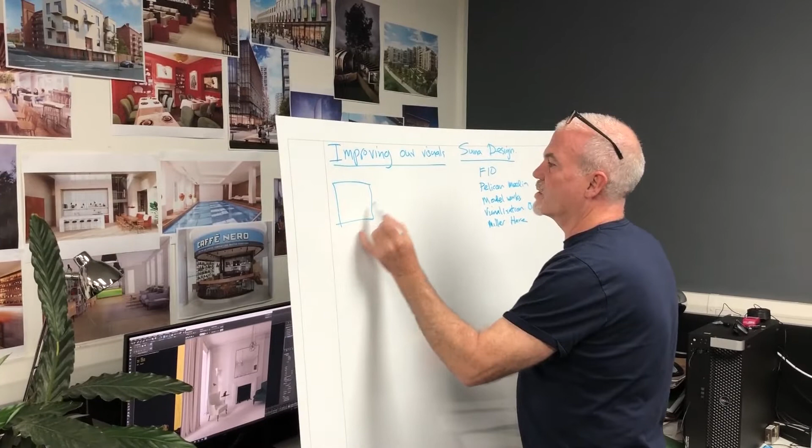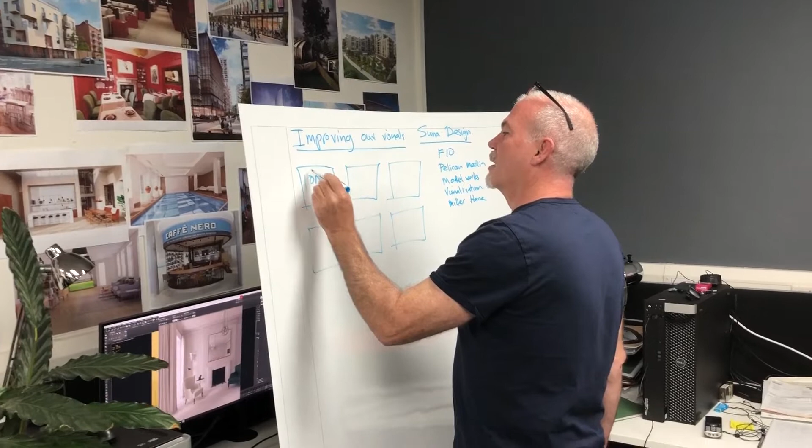So, there's I think about 5 things we need to do. One of them we've already done, and we are better than most people at: modelling. Our modelling is the best. He's the best 3D modeler I've ever seen. Quickest. Nothing he can't do. So we already win, we've got one of them already done.

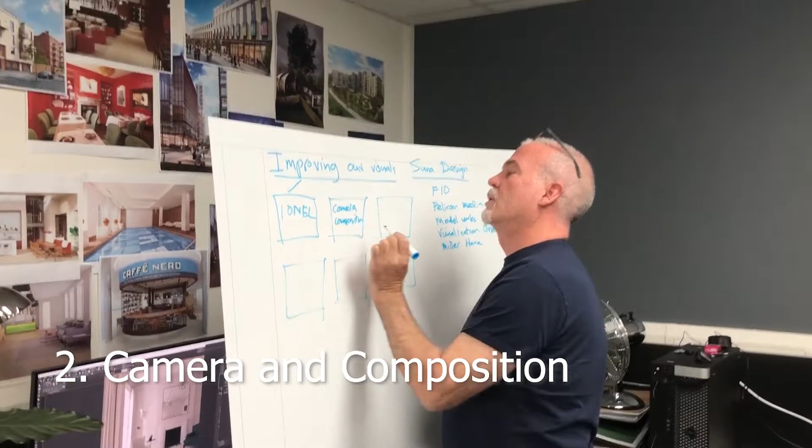That was easy. Next one is camera and composition. I'll do them one by one, that's the easiest way. So, real world cameras, obviously realistic cameras, so correct ISO.

Try and use an actual camera, so 400 ISO, 200 shutter speed, f5.6 is a good kind of setting - if you had a camera and you were in a room and there was light coming through windows and you took a picture with that, you'd see a picture. We're talking interiors, yeah, that's for interiors.

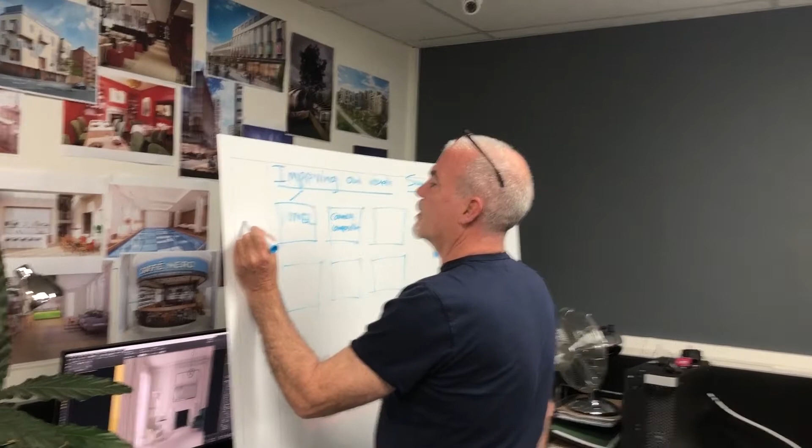So those settings, I mean, we can write them down, they're easy. F-stop 5.6. Shutter speed 200. Film speed 400 ISO. So that's an interior camera, that's fast film. If you took a picture inside a room without the lights on in daylight and it had some windows, you'd see stuff.

So that's a realistic camera, so there are ways of getting realistic camera numbers, and then the composition is the next thing. This is a big one. All of these pictures have a low eye line.

They're all 1.3, 1.4, sometimes 1.2. And ever since I've been doing visuals, since I was 25, when I was doing watercolours, interior visuals are always low eye line. The lower, the more sexy and inviting it is. This is just above the chair, it's like 1 meter 100, but it makes you feel incredibly comfortable in a part of the room. The higher you go, the more distant you feel from the comfort and the less comfortable you feel.

Clients always endlessly fighting about this, because they think people want 1.7, so the camera should be up here, but it looks awful from interiors. Just see how low that camera is. So this one, this one, 1.2 maybe, 1.1. You know, super low, and it makes things look comfortable. You're part of the room, it's engaging. So a low camera, 1.2.

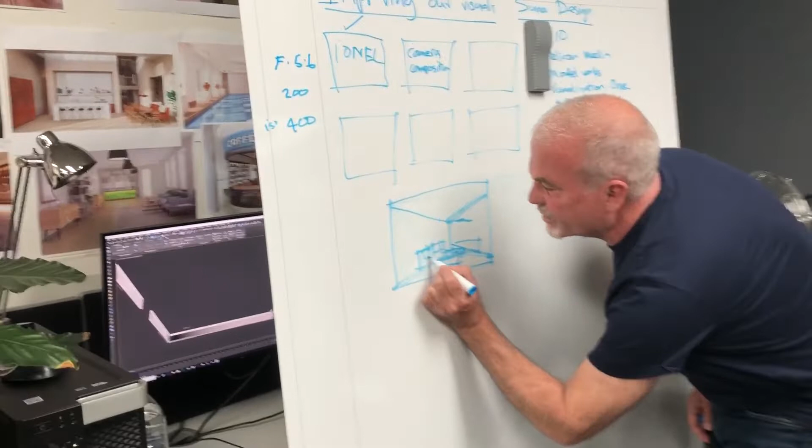So you want a low eye line, and you want to see two walls if you can. Now clients endlessly fight about this because they want to stand at the back of the room and see absolutely everything. So the battle is to get as close as you can - there's a nice chair, a coffee table right in the foreground, you can see everything, the cushions, the fabric, everything beautiful and up close, a lamp. And they'll say, that's great, but we want to be on the other side of the room. So you have to drag them back to this as much as possible. They won't want to do it, but if you keep showing them visuals this close up that look great, eventually they give in.

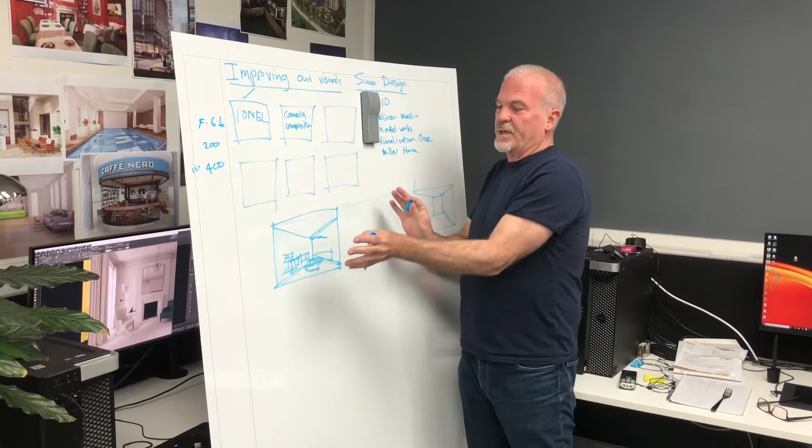Same with the eye height - raise the eye height a little bit. Old trick is you say yeah, and you build it up a little bit. That way we want to keep the camera as close to the small part of the room as possible, and keep the camera height low.

Another nice trick is to have parallels, like we did on the close-up there, at the table. One of the reasons that works so well is it's all parallel lines - that's a very pleasing visual, all that way, same thing all that way. Squares are always very good, as long as you have something symmetrical happening.

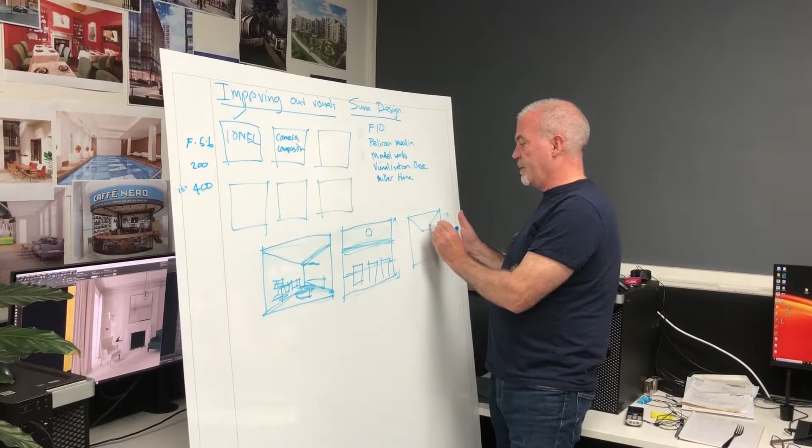So these are just compositional tricks, nothing to do with what's happening inside the place at all. They're just ways that when you put the stuff in there, it will look ten times better than if you had a huge room with all four walls showing. It's the same, they're doing the same thing - basically it's an elevation. The sun is coming in completely at the right angle there.

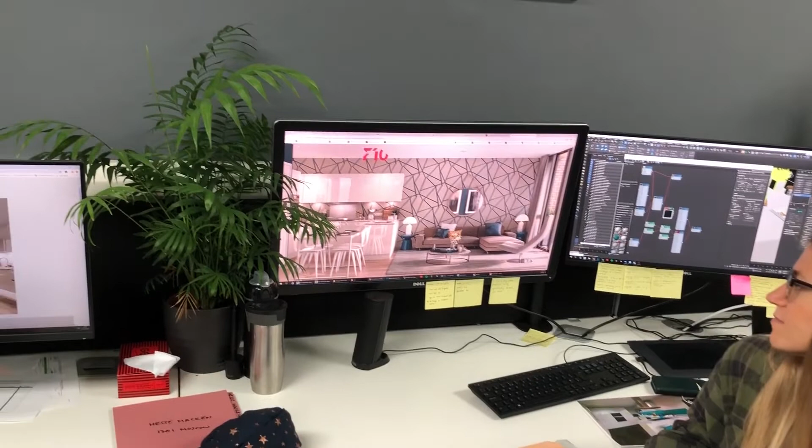Same thing, the sofa here is straight on. It's quite clever what they've done here, because this is quite a confusing line, and they've broken it up with this being the same as the soffit and the ceiling. It kind of becomes a back wall. You don't suddenly think, oh, that's the - I'd be tempted to put the glass there and this bright sky, but they've mushed that into one kind of thing, and what you see is this strong, dark sofa. So that's all compositional - one reason it works so well is the composition is lovely.

The other thing this has got, which is great, is L's - L's all the time, L's are brilliant. It doesn't matter what it is, whether it's a door, then a shadow, then a bit of sunlight - L's will always help the visual, especially L's that are interlocking.

So low eye line, nice composition. You move things about and try to get as close to the stuff as possible, and then we'll fight with the client about it. So come back a bit, we'll come back a bit - I want to keep as close as possible. It is a big battle. Often you don't win, but if you do win, you end up with better pictures than you could otherwise show.

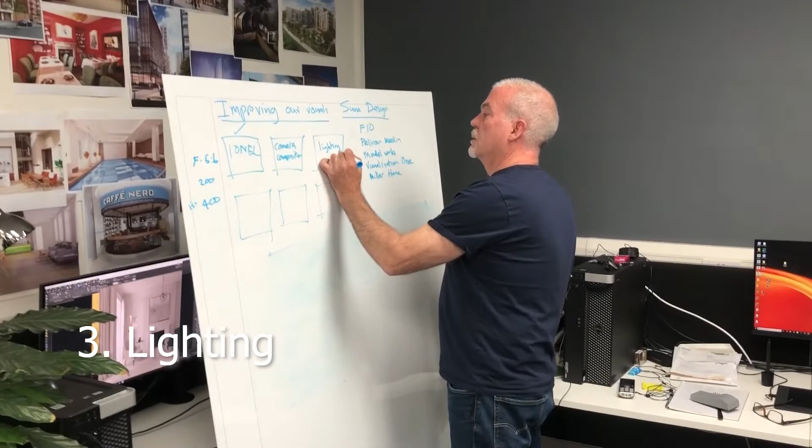HDRI, always. HDRIs are wonderful, they make everything ten times easier. What I'm doing at the moment is I've got an HDR as the sun, I've got an HDR as the reflection override - that overrides all the reflections in the scene. I've got a background image of whatever, could be white - I use white at the moment, it's easier.

I've set that to zero. When you say the HDR is the sun, is that as in a V-ray sun? Yeah, a V-ray dome light with an HDRI loaded. Okay, so a dome light with a V-ray. Yeah, okay. What about the GI now?

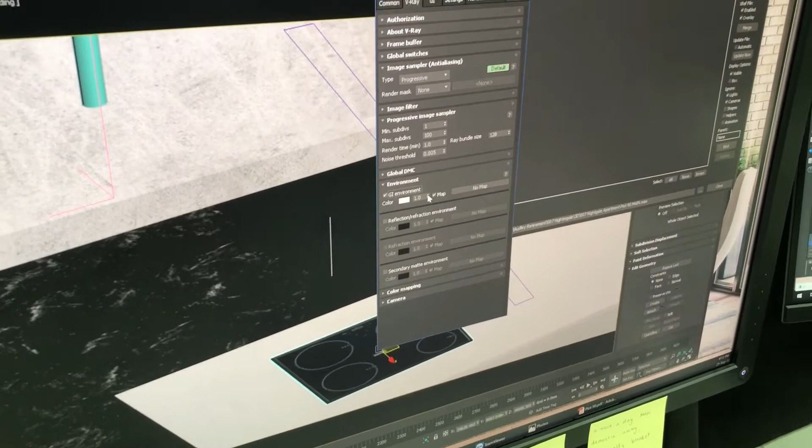So yeah, GI environment ticked to 0.0. That avoids any unnecessary self-illuminated objects, suns, or background images affecting the lighting. This way, we control how much light's in the scene with the sun, we control how much the reflection is from that, and that makes sure nothing else in the scene affects the actual light.

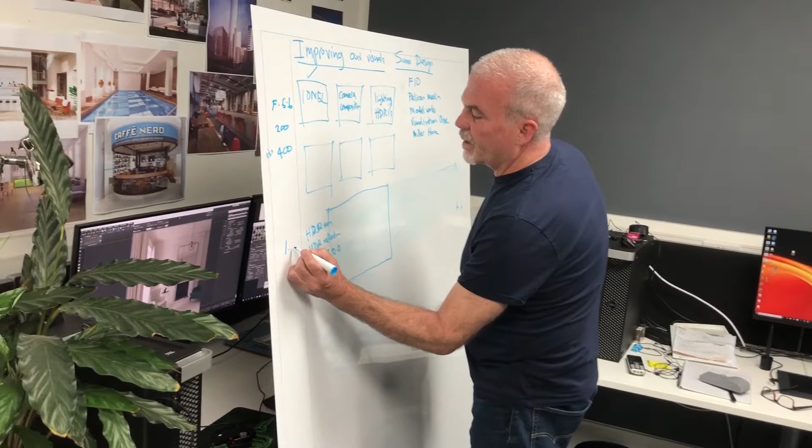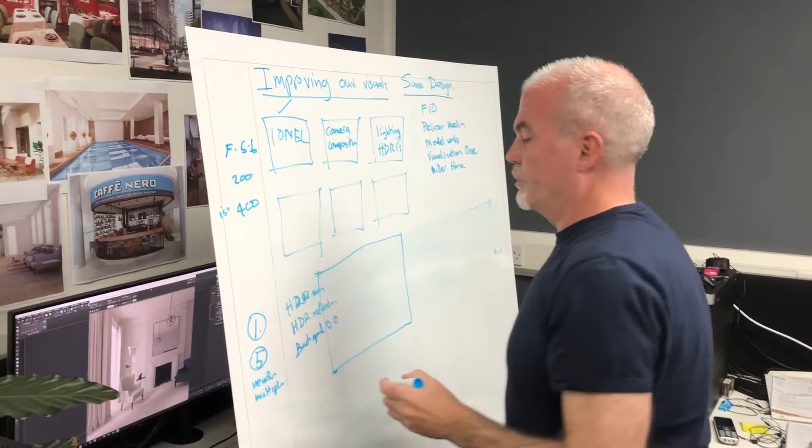So if you turn that down to 0, it'll be black. So what I'm doing is I'm putting that in at those camera settings, putting that in as 1, and then you always amend the render multiplier, so you leave that as the render multiplier. And the one is the light multiplier - never change that. The overall, or is that the overall multiplier?

The render multiplier is in the HDRI, in the environments. So if you're in the material editor... Oh right, well I don't have one. Okay, but yeah, in the material editor you've got the overall, and then you've got the render. So overall always stays at 1, never change that.

That's your light power, yeah? Render just basically makes it dark. It's like somebody outside with a giant spot turning up or down.

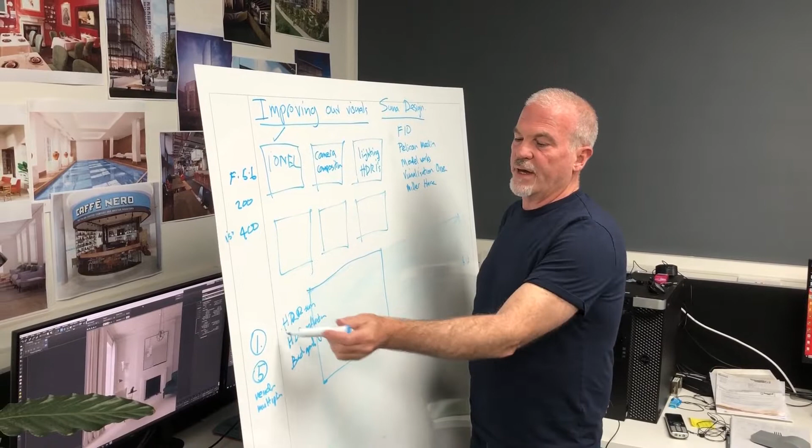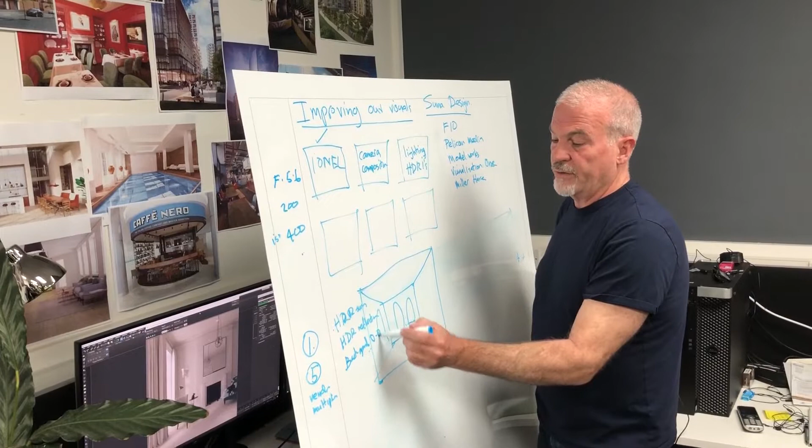So what I'm doing now is I've got the scene, I've got this stuff in the background, I turn all this off. And with these camera settings, I then put an IES light in a scene. With everything off, it should be black, right? Everything off is black. If I've got a background image, which, because this has been turned down to 0, is generating white light, that'll just generate white outside the windows, but it won't be lighting the scene. Sure.

With an IES light, I don't change its multiplier at all. So whatever that IES light's number is, I don't know, 720, whatever it is, whatever it comes in with - that's the light, that's an actual real spotlight which actually has that value, and if you put it in a room, it would brighten the floor that much.

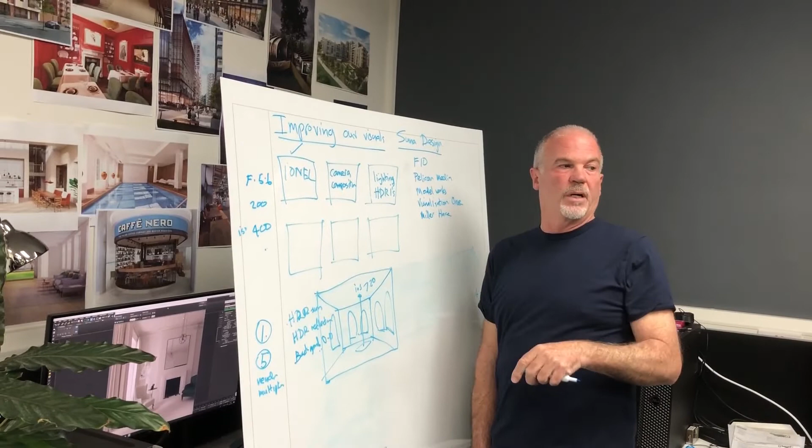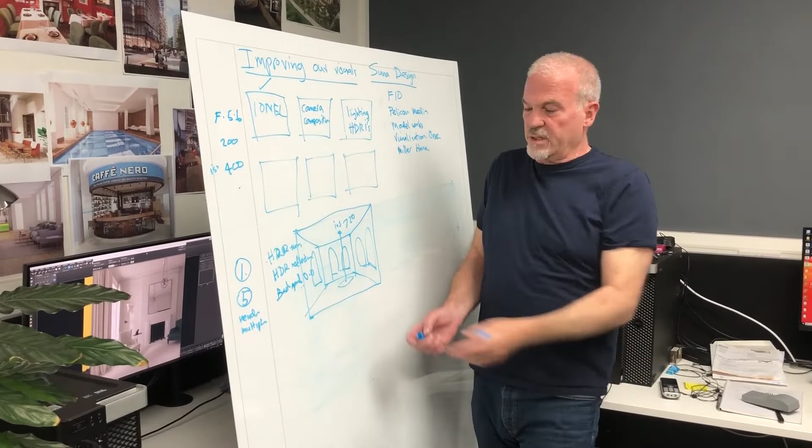So you do a render with that. If you can't see that, then you need to change this. You change this until you can see that light in a sensible amount, so it's not burnt out insanely. But if you imagine yourself standing in that room in the daytime, and somebody switched on one spotlight, what might you see? A kind of gentle pool of light. So if you do that, and it looks sensible, then that scene is naturally lit.

Then you switch this on to like 1 or 2, and that'll be your sun coming through, and that will light the whole room. You can have an override material on the floor which will generate white light. Instead, if you've got an orangey floor, an override material will generate white light. That should give you a naturally lit room.

You can then start cheating. So if you change the V-Ray properties tab of the floor to a number greater than 1, like 1.2, light falling on the floor will be bounced upwards. And that helps you light the ceiling and the room itself. That way you should get a naturally lit room.

Then the next thing to do is, what I do now is I turn up the sun too much. So this is... Ask questions if you have questions, guys. If you don't understand something, ask.

Say this is the sun here on the floor - this is white, burnt out completely. I'm happy with that, I want that to happen. Because we're rendering in 32-bit, we can change all that later. But by burning this out, it's generating more bounce light, which means less noise, and a nicely lit room with one light.

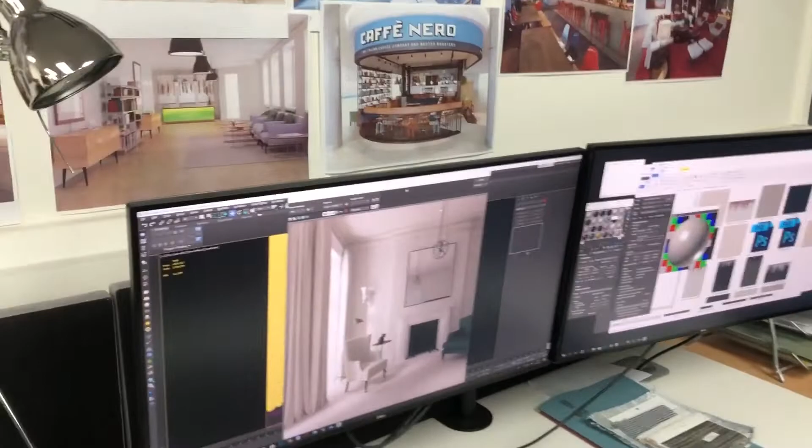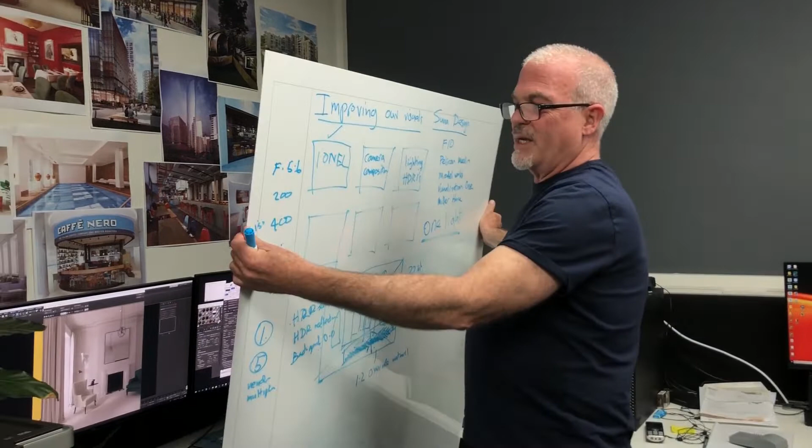One light. It looks realistic because it's lit by the sun, and we know how realistic things are because we see it all the time. We're convinced of realism by the sun. It looks realistic because it's one light. When he switches on the wall light, it will look all right and nice, but it just won't look quite as good.

When you say you make the floor burn, the light up the floor burn out - yeah, the sunlight shining, this HDR sun shining on the floor. What sort of burn value? You don't want it to just burn the whole image. You just, well, you don't have Reinhard switched on in your camera settings - that's color mapping, right? You have color mapping.

Color mapping, have linear on. We want to see how much it's burning. If you have Reinhard on, you're already crushing highlights - you're amending the 32-bit information in the image by using Reinhard at this stage. So what you want is to keep using linear as much as possible.

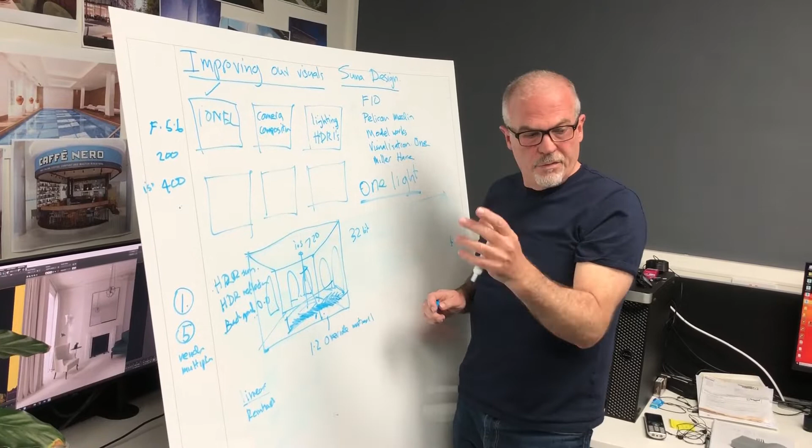We don't want the whole scene completely insanely white, but you can turn the sun up to 1 and still see the brown wood. Turn it up to 2, it's a bit washed out. You want to turn it up to 4, so the streaks of sun are overly burnt, but not the whole room.

Then when you use Arion or Camera Raw, you crush those highlights, which is easy to do, and the rest of the room stays beautifully lit and relatively noise-free. More light in a room equals less noise.

That's difficult to achieve. If we can do it, it's brilliant. But the further you can get with just using one light, the better it is.

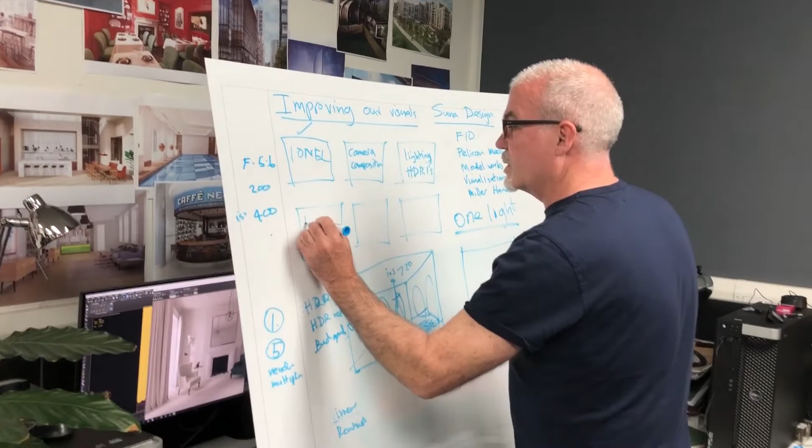And this is what we were doing the other day, and this is a big part of the next thing - textures, materials.

So we've got VMPP, which is brilliant, which is lovely. We've got Poliigon on the server, which are really high quality maps - very high, way too big most of the time. 3,000, 8,000, they look amazing. The bigger the maps are, the better.

There's a way of doing the reflection with fall off, which I've shown you - you don't have to do it, but it's what VMPP uses and it works really well. You can control the shininess of the wood, the fall off of the reflection, the fuzziness of the reflection, all independently. It's really shiny but not too fuzzy. That's a really good way of getting things to look interesting.

So I'd say VMPP - I'm going to call it fall off in reflection, but that's the method I've shown a few of you. That's a really good way to get materials to look good. Leather, wood, fabric - that works with all of them. Poliigon.

What's the next thing I want to say? What's the other beautiful maps? I love these guys - XYZ texturing. These are beautiful fabric maps. They mostly do skin for movies, but they've also done fabrics. They're very detailed, and they have a fantastic displacement map, built in 3D.

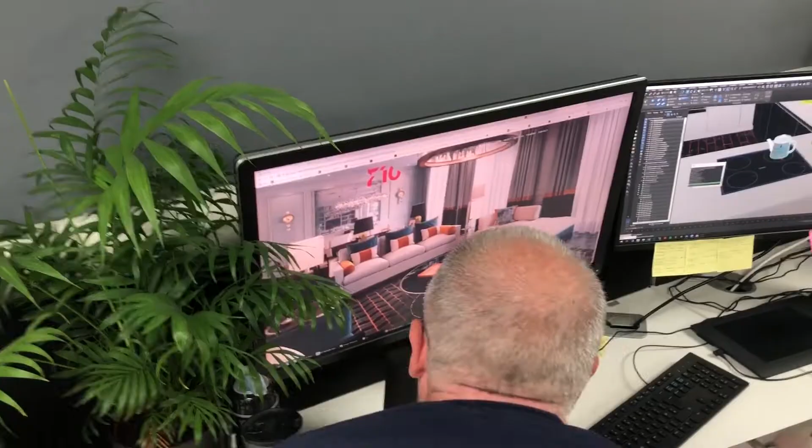Yeah, these are nice - that's modelled, I think, on display. But this is what we want: this kind of level, you know, the furriness, the touchy, scratchiness of the fabric.

Well, that's a great one - it's got fall off on it, a bump map on it, displacement on it, fabrics going different ways. There's a variety, a kind of blend mix in the fabrics as well.

That level of detail makes fabrics look ten times better, and also in the end it's less work because the fabrics already look brilliant from the render - so there's less fiddling about sticking.

Fuckers. Anyway. Yeah.

If we build a scene, what would be nice from now on is that we follow those rules about composition and lighting and stuff. This will really help things look good, believe me. If we make all our materials like that from now on, everything we build will be in the library and will have that level of detail.

One thing I'll say is there's a battle between the clients and us to do nice visuals as opposed to giant widescreen crappy visuals. I've been doing visuals for years and it's never changed, it's always been the same. When I was doing watercolors of city banks 30 years ago, they'd say 'can we be down the end of the street for you?' It's always been like that, and the closer you can get to things, the better. There's always a trade-off, we need to fight that battle a bit.

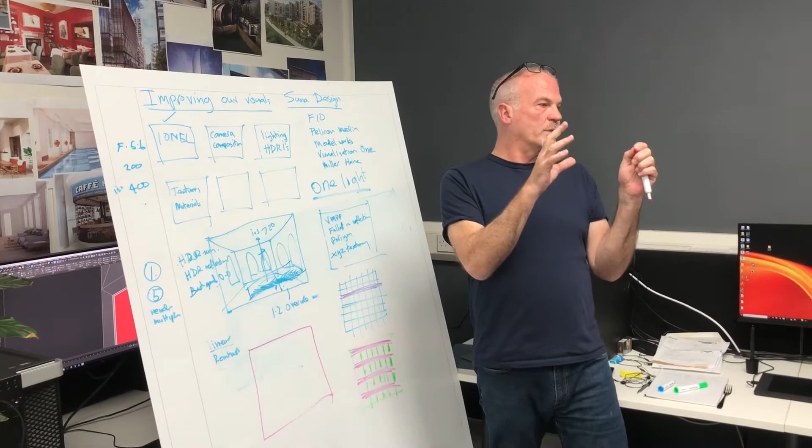Normally what I'm doing is a 32-bit render, obviously that's burnt out in the highlights. I render an EXR. The RGB layer of the EXR, I run through Arion to crush the highlights and do a bit of Reinhard to make it look more filmic. I do the glows - Arion does burned-out glows from lighting fantastically, most realistic of all, I think better than human sometimes. I put that back as the RGB layer at the bottom.

Then I put the reflection, refraction, specular layer on top of that and fiddle about with those. So this is in Photoshop - I've got my RGB, this is an EXR, and I've got it labeled like this: RGB, specular, reflection.

So this one I do with Arion. I haven't figured out a way - maybe one of you guys can - to make that a smart layer, do the Arion stuff to the smart layer, and then just have it as a smart layer. Because when they change their mind, you have to re-render it and guess what you did to it. If it was a smart layer, you could just put the new render in and do the same things again.

But with this, it doesn't work that way - it does that annoying thing in Photoshop where when you change it down from 32-bit to 16-bit, it blows out everything. I think the way to do it is you have to use that Photoshop dialogue when it says you're going from 32-bit to 16-bit and let Photoshop do the conversion.

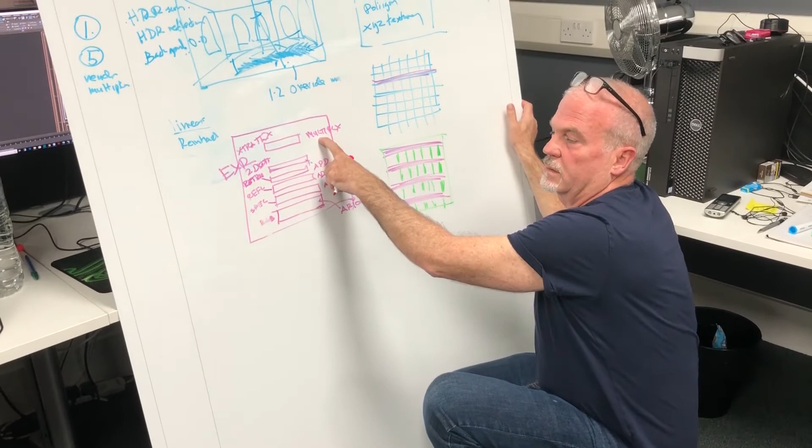So everything's add except for that one. I'll do Z depth in a minute. At the moment I'm doing Arion to the RGB, then putting this stuff on top.

Extra text there, and then that's all made into a smart object. Right click, select all the layers, right click, make smart object. Then you can convert that to 16-bit in mode.

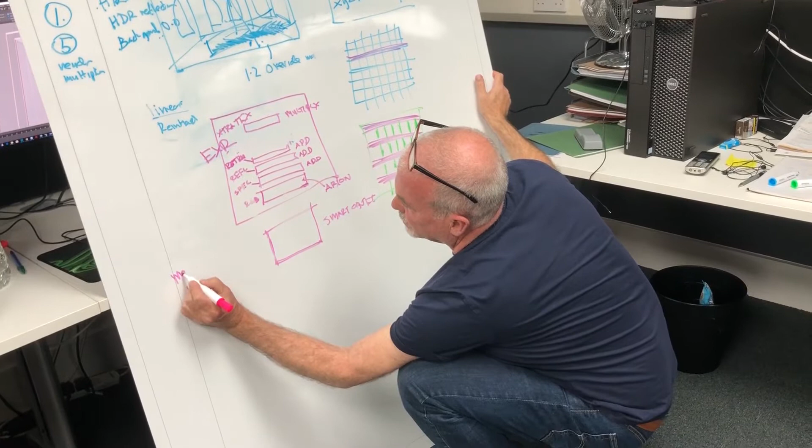And it won't alter the exposure of the colours if you don't collapse layers. So then that smart object you can use camera raw on, which is all right, but I don't like it. I've fallen out of love with camera raw.

It's too sharp. It's too 80s, it's CG-ish. Arion's nice. It does a bit of sharpness, but it's not the same. Camera raw's got a kind of thing.

Camera raw's limited, isn't it, in what you can do? It's not, it makes things look... it's like that old Lanczos filter, or that old Max filter, not Area, the old one that made everything look really super sharp and CG-ish. It's a bit like that. It looks really great, but it's a trick.

But it's all right for doing certain things. It's very good for doing the exposure, crushing the highlights. It's very good for the blacks. It's very good for color correction. And it's very good for the sliders for particular colors - if you want to boost green or boost orange, it's brilliant for that, which is a very good thing to do.

Smart object, do your camera raw stuff, do your colours, then you've got an image. That's the basic camera raw way of doing it. Nuke is elegant and gets great results, but is limited.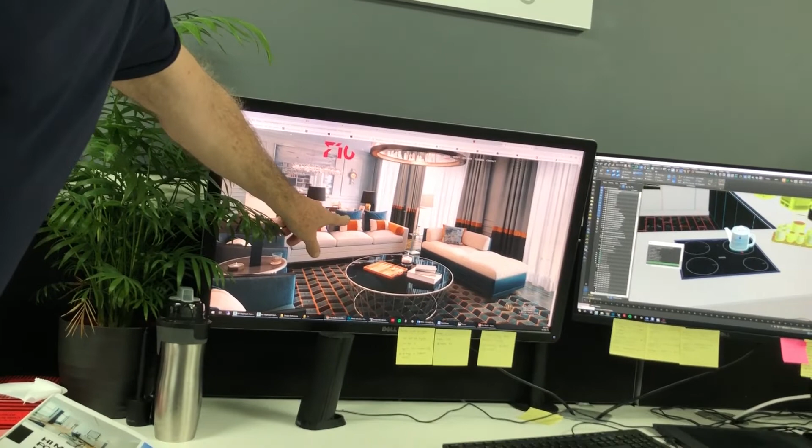Any colour? Yeah, burnt orange and a nice blue. But look, the copper has been pushed - they've definitely done this. They pushed the copper; if I'd had brilliant V-Ray super shiny copper it wouldn't have worked so well. They pushed the inside of the light to the same thing, the highlight in the carpet, even the backgammon table.

You'll find the same with woods - they don't want to have like five different colours of wood, they say wood with wood. You'll be amazed, one, maybe two.

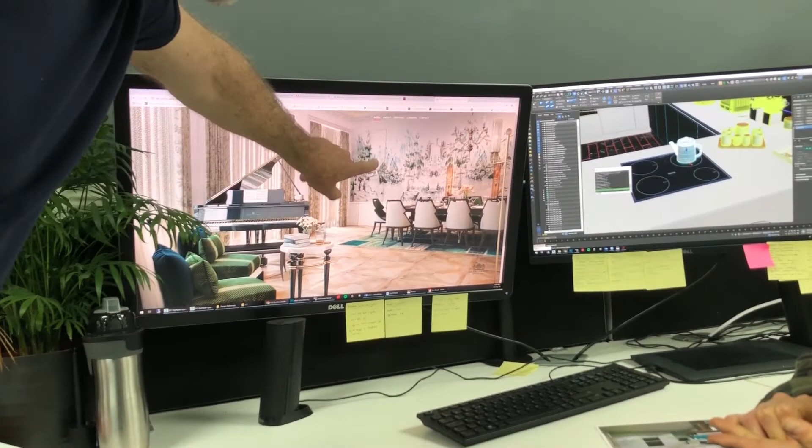Good visuals - how are you going to get more of these? It's difficult, it's really difficult. But look, see the green, the green, the green, and then they got this, the green - then they got that.

The green? I think they've even made the blue - they've got a bit of green, made it a bit into green the blue, in the piano, yeah.

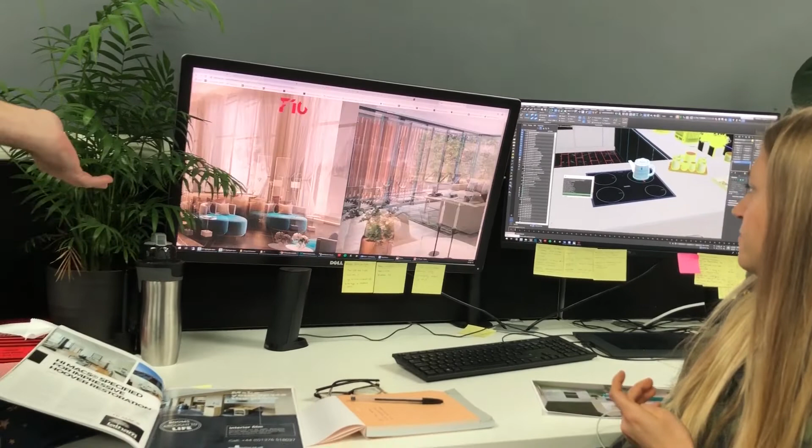Right, see, yeah. And the better the visuals are, the more disciplined they are. You think, how can they possibly make that work? It'll look so corny, but it works unbelievably well.

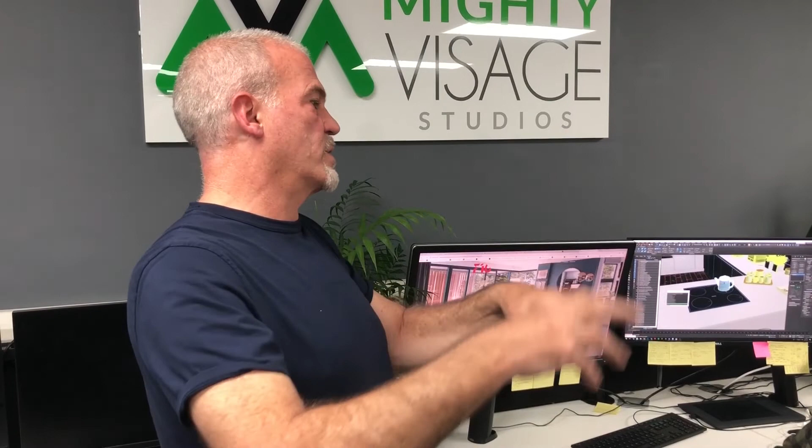It's very difficult to get people to do it, and the designers have probably gone for that from the beginning. So certainly if you've got Bernard Interiors, they'd probably go for it - they were quite close with the bistro, that blue. If they had a corresponding orange of the chairs and pushed that everywhere, with little accessories, pots and pans, whatever, vases.

One light. One light, one HDR, and they've got a bit of warm light on here, and a bit of warm light. I don't like that.